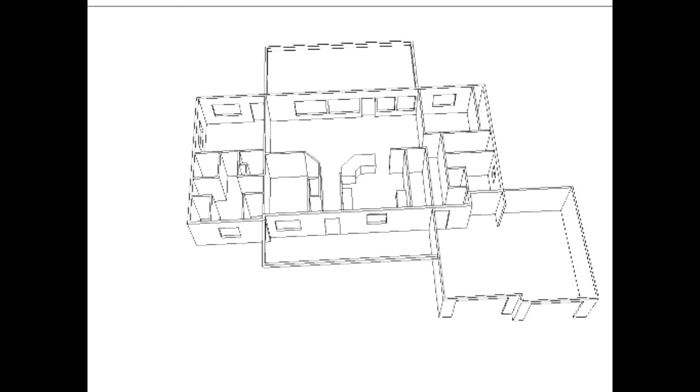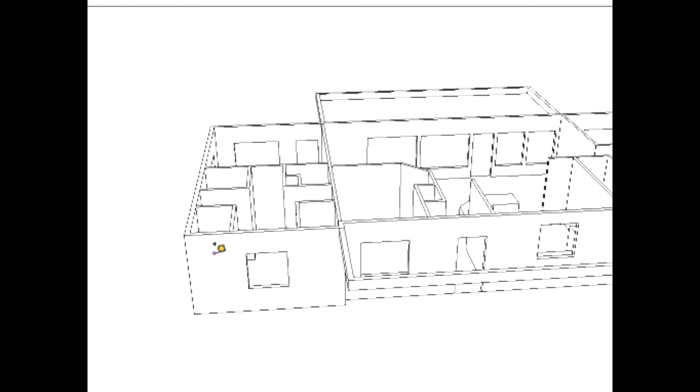Okay, what I did is added the windows and the doors. Let me get my tape measure. Here at the bathtub, I put in a 4x4, and assuming that would be obscure glass.

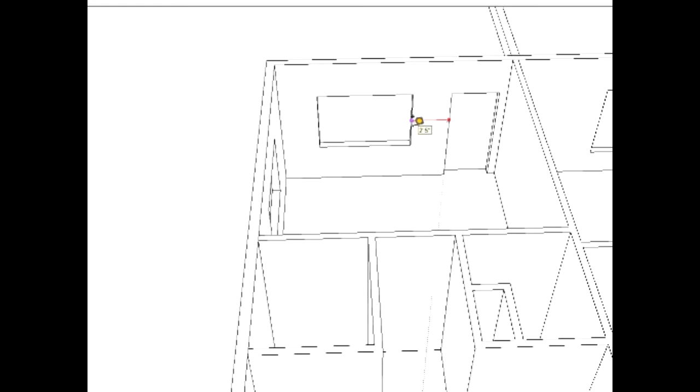Here, I think we had originally talked about on our first piece of paper having a 6x4 here and a 6x4 over here, and I just centered this one in this wall, and then this one, so you didn't have to have safety glass here. I put it like 30 inches away, and then I basically centered it between the door and the wall, giving you 6 inches here. This being a 3-foot door, which I assume would be open glass, or a glass one.

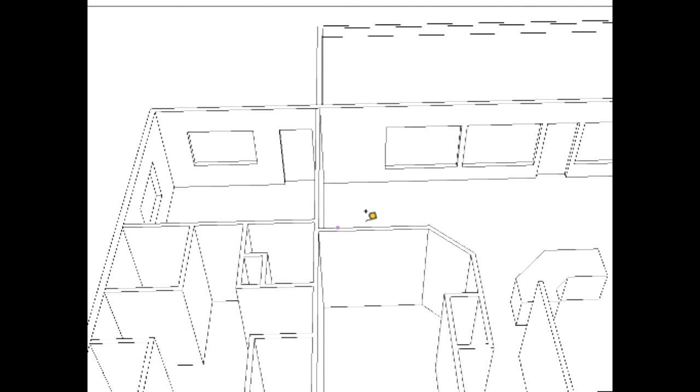And here you talked about having a fireplace over here, so I went off a standard distance for a corner, and was just kind of playing with it. This is just giving you even sizes and stuff.

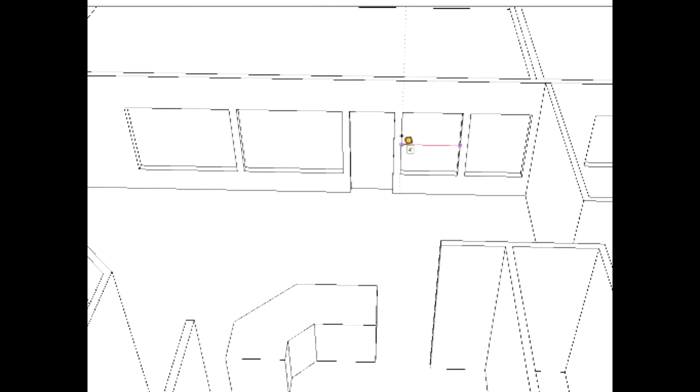I went 7 foot on those two, and 4 foot on those two, with them all being 5 foot tall. And this door is there at 9'6" from that direction, and from this direction it is 21 foot. So that's where I placed that.

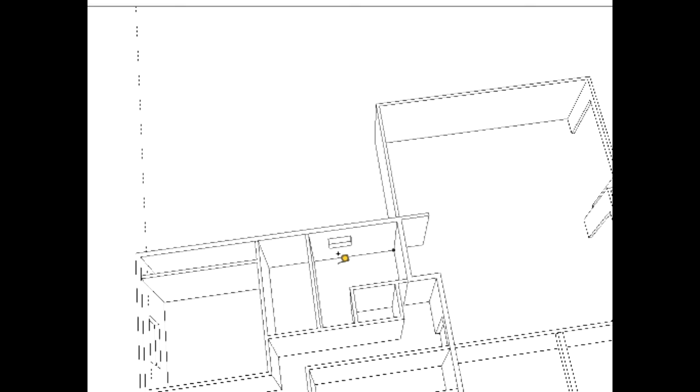This being a 5x4, I put a window in thinking that this would be dryer, washer, and then you can put the sink right there and some cabinet space, or you could put some countertop space and then the sink. But anyway, I was thinking you put the sink right next to the washer and then a window over that. That was just what I was thinking, and I made it 30 by 3 foot.

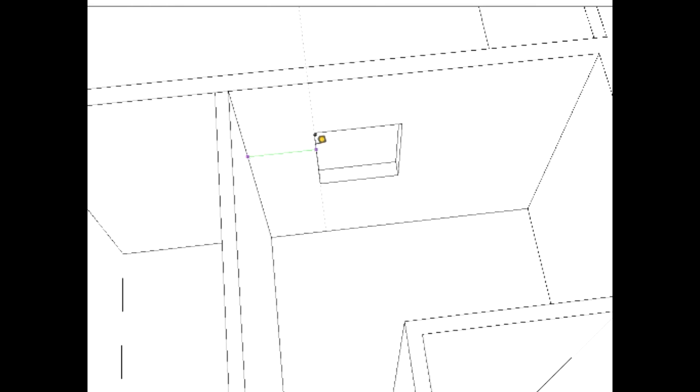Simply made that narrow so that you could stick it up right there. But anyway, that was my thinking with that.

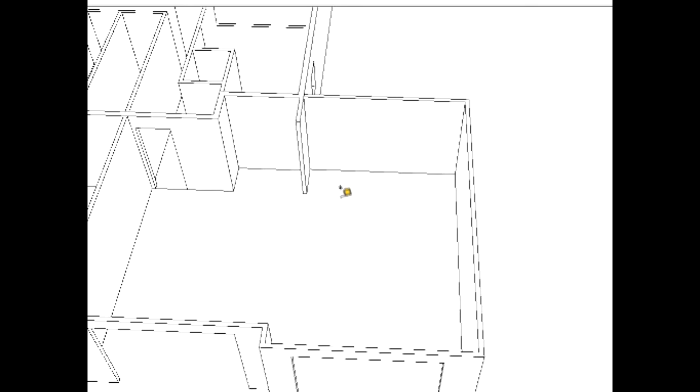We never talked about a window in the garage. A lot of people like to have a window in the garage, and I believe you wanted a door back here, but I didn't put it in. You might remind me if you wanted a door back there, or if any windows in the garage.

And then I centered this one inside of the office and made it 5x4, and this one centered over the sink, and it's 4x4. If you'd like it bigger, just let me know.

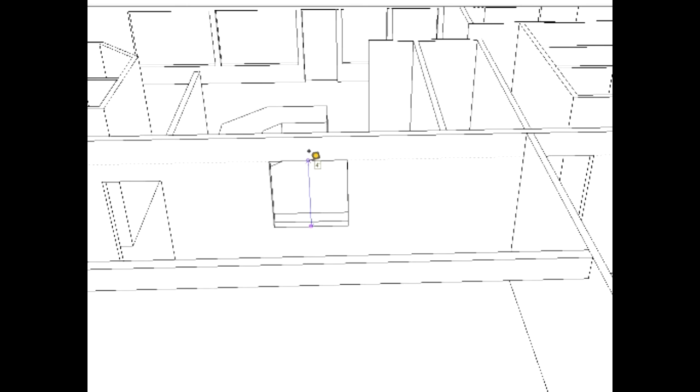And then let's take a look at the roof real quick. I haven't spent a lot of time detailing the garage. This is what it would look like if you did all being 5/12, and to get your attic space in there, you'd have to have that kind of a roof.

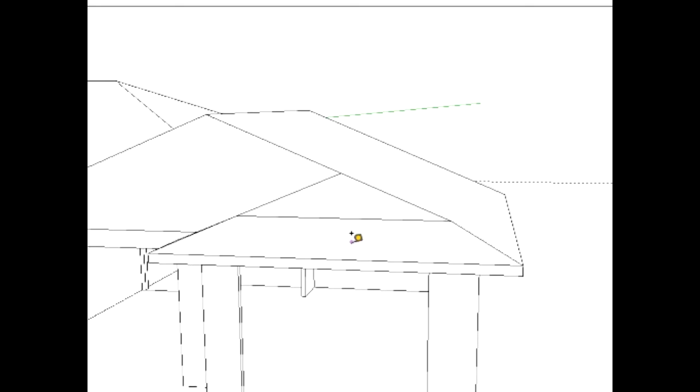You wouldn't necessarily have to have this Dutch hip thing here. This could also be a smaller version, just a gable that comes all the way up to the front of this wall instead of being held back that 2 feet. But that is basically what it would look like with a gable on the front.

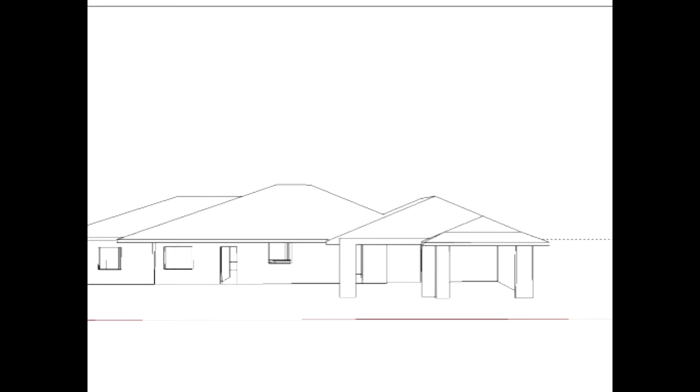I'll show you what it would look like with a hip on front. So this is basically what it would look like if you had hip all the way around this. This is how I think the hip would go.

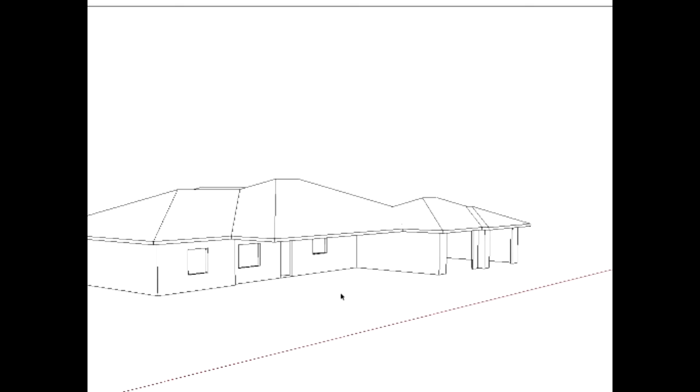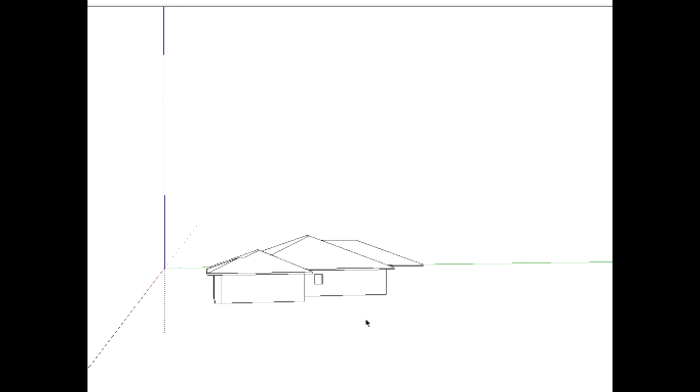It comes all the way, this kind of a big one that comes out to the front of the porch, then the bedroom end, and then out the back. You cover your porch like that, like you wanted. So it's kind of your call what you would like, the full hip or whatever you would like in front.

The hip in this is a 5/12 with 2 foot overhangs, and the only reason you would go with the gable in the front would be for the attic trusses, or if you just like that look. So anyway, get back to me. Thank you.